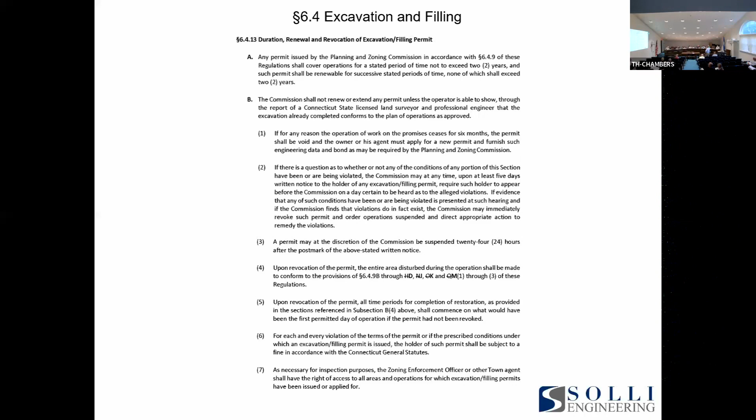And then towards the end of 6.4.23, it does talk about the waiver. We eliminated that component from the regulations, and the courts have continued to reinforce that this commission doesn't have the ability to do that.

So what we propose, we do believe is in accordance with both the comprehensive plan and the plan of conservation and development. The POCD in several different sections talks about encouraging economic development by providing this clarity and this clarification. This really allows the commission to view applications on a case-by-case basis, evaluate what's being proposed from a grading standpoint, and make decisions without having to rely or refer back to this waiver provision, which again has been shown to not be within your purview.

On page, I'm just going to touch on a couple of these. In the introduction on page 8, it talks a lot about a survey that was conducted. A lot of the survey responses in that POCD talked about wanting to see continued growth and change, but incremental. Again, by allowing these changes to be enacted and adopted, it gives the commission further ability to do these applications on a case-by-case basis and kind of encourage and fuel that growth.

All right, so you all know that we need to change this language. By changing it in this manner, the slope and grading requirements and the importing of material will be under our control in each application. There won't be a blanket statement saying you can't do any of this, and then we come back later and say, oh, but you can. This way, during each application brought before us, we'll be able to say this is what you need to do as far as grading, slopes, and importation or not.

Questions? So I know, Mike, you just said we still maintain control for grading and for what? Slopes. Still that. What about bringing fill in? Yes, for any application, the commission has the purview and authority to review what's being proposed—if it's import, what kind of material, how it will be handled—and you can include specific conditions for any application to address all of these things.

So again, these are even conditions that you could apply in the future for any application, but by limiting them as mandatory conditions and limiting the waiver provisions, it really gives you the most control and helps alleviate the issues that have been raised from some court proceedings.

Thank you. No other questions. Just out of curiosity, if that's the case and it was under our control to begin with, why were they written into the regulations to begin with?

That's a great question. We went back from a historical standpoint, and the excavation and fill permit regulations have been enacted for a long time. I think the earliest version I saw was 2003. A lot of the conditions were written very similarly. I'm not sure where the 27 degrees to the horizontal language even came from. A lot of communities don't have that level of specificity in terms of standard conditions with excavation and fill permit regulations, so I'm not sure where it came from. But I think the waiver test is something that came up probably in the last 10 years, and it's just really been tested in some court proceedings recently.

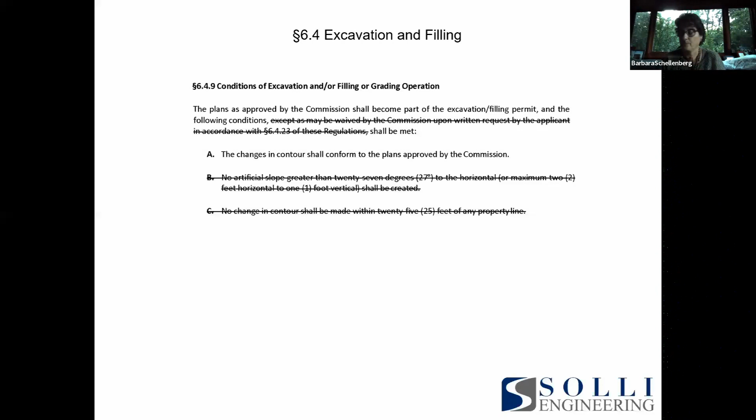That's all I needed to hear. I'm good. Commissioner Ambrosi, yeah, so where are we moving?

So, that's the stuff, right? Yes, correct. And I believe that other towns may be a little bit more strict, but I don't believe other towns just remove the regulations.

Well, again, we're not eliminating the excavation and fill permit regulations. No, but we're eliminating distance, we're eliminating certain things. Yes, we're proposing to. Certain towns have different regulations than we do.

Yes. I believe that this should have been brought to the subcommittee before it was brought here, so we could look at the other regulations the town has for grading and fill permits, and for footage and grades and everything like that, because just removing them affects the whole town.

Well, I don't believe it affects the town. I don't believe it creates any negative implications or effects, because these are specific conditions that talk about very specific slope requirements within side property lines and front property lines.

Now, any application that comes before this commission has to include proposed grades. They have to show what grading is being proposed, if any grading is being proposed within a sideline or a front yard, or how far from the front yard. So this commission still has the ability to ask what the slope is there.

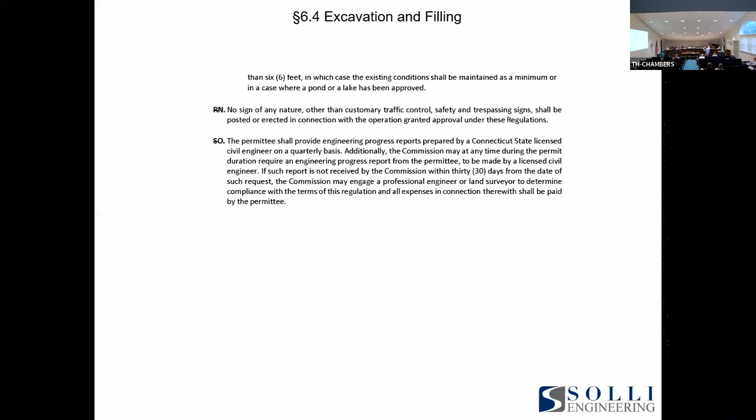There were a total of, A through S, from a standard condition standpoint, for the excavation regulations. We proposed to remove four and modify one additional one. So all of those other conditions, which are very appropriate, still apply.

Now, you've argued to go to ZBA. The Zoning Board of Appeals is a very strict process in how they review applications, and they have to look at what's being proposed and whether or not it creates a hardship, or what that hardship is, or if it's self-created.

If I was to come in with an application across two pieces of property where I wanted to develop and create a unified development, let's point to the Aldi, Panera Bread, and Noble Gas site. There's an overall development comprised of two different parcels, and there are provisions that say you can't change the contours within so many feet of a side yard, which would make that project not viable if this commission wasn't able to waive these standard conditions.

So again, it allows — we couldn't go to ZBA and say I need a variance for this requirement because it would be self-inflicted, self-created, and that's subject to a different type of test from a legal standpoint. But by eliminating those conditions from this waiver provision, this commission still has the authority to review proposed plans and review proposed grading.

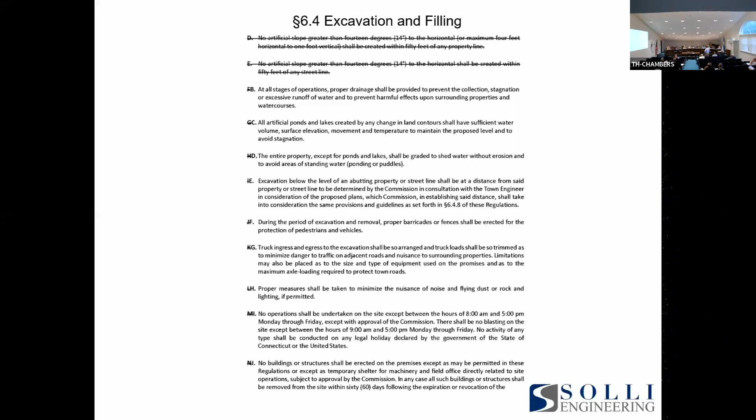The part I'm not catching here is, we take these out, strike them out of the regulations — what mechanism is in place to get that application in front of us? Oh, it's still going to come in front of us. Yes, anyway. Okay, those requirements are gone. Got it — upfront requirements, which we can put in, you have to go to the ZBA route for those provisions. I understand that. I'm saying to you that the requirements are gone.

And we can make our regulations to accommodate whatever requirements we want. But right now we're just removing them. We're not changing them, we're not making them better for the town, we're not making them uniform across other towns — we're just removing them. It should have been brought in front of the subcommittee, and we should have hashed it out before we ended up changing the regulations.

It depends on who you ask, though, if it's not better for the town. If you ask the land use attorney, it's better for the town.

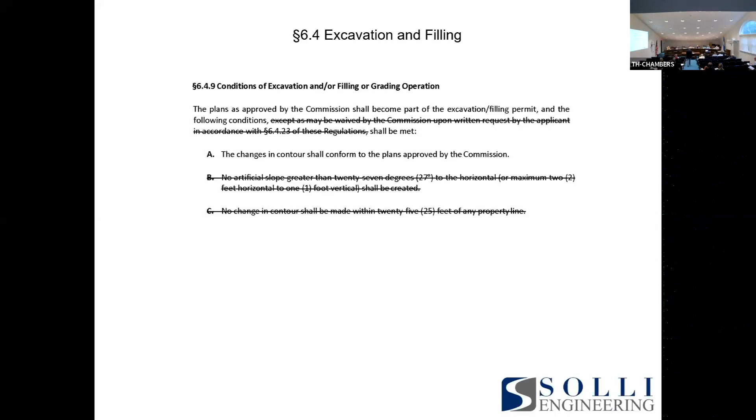All right, let's go to the public now. This is a public hearing. If there are any members of the public here tonight that would like to comment on this application, please raise your hand. I see someone with their hand raised — right up front. Please speak into the microphone and just give your name and address for the record.

Thank you, Mr. Chairman, members of the commission, staff. My name is Joel Green. I practice law in Bridgeport, the law offices of Green and Gross. It's my pleasure to appear before you this evening on behalf of Peter Metropolis, who's an owner of the property at 136 Timothy Hill Road in Monroe.

By the way, just a note, when I looked online, I did not see the exhibits which were referenced. I'm not sure whether they're... oh, they are online, because they were not in the packet or in the materials today. Mr. Chairman, I had staff check that today, so I know they are on. Yeah, okay, well this morning I didn't see them, but be that as it may...

I'm going to ask you as a commission, on behalf of my client, to judge the wisdom, the ethics, and whether you are fulfilling your duty to the citizens of the town of Monroe with respect to this application.

I've been before you before. I was before you on the Cambridge Drive, Independence Drive project. This waiver argument is nothing new.

It was already tested by the court in the McKenzie matter, which was in this town. The court said you can't waive these requirements on a case-by-case basis. So the answer is not to simply have no standards for slopes and filling along boundary lines, but, to Commissioner Ambrosie's point, study it.

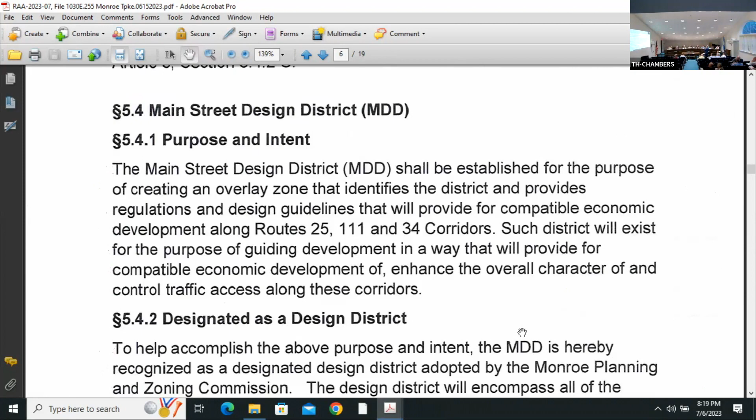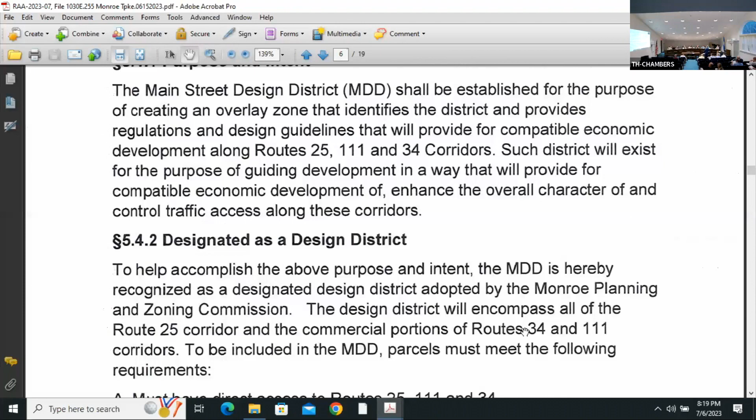So this is our first - I'll just bring it up to the top. You have copies of all of this; it's all been filed electronically as well. This is the Main Street Design District. One of your requirements when asking for a zone text amendment is to present the full current zone text with regulations. You can see here it provides for compatible economic development along Routes 25, 111 and 34 corridors. As I said at the beginning, this property sits on 111, designated as a design district.

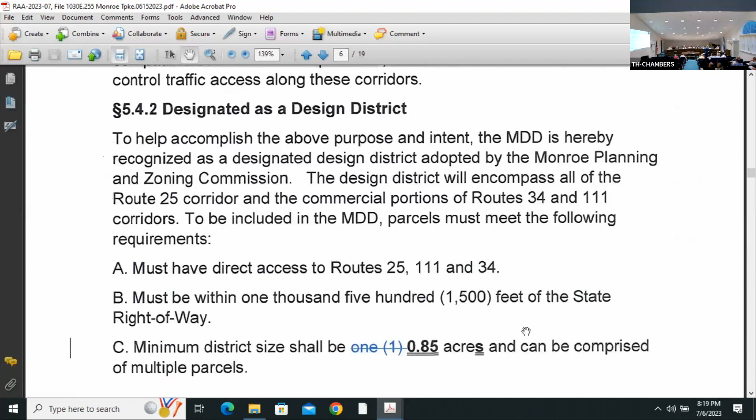The only text change we're asking for here is the minimum district size, currently required to be 1 acre. We're asking for 0.85 acres. Right now the parcel is actually 0.89 or 0.9 acres. I'll talk about how that's in compliance with the plan of conservation and development and comprehensive plan in a moment. But this is the first required step or action by the commission if it sees fit to approve this application or move forward in the process. We would need to, and have had conversations with town attorney Ben Marino about this.

He felt that we needed to apply for this zone text amendment. I respectfully disagreed with him based on a regulation in the Town of Monroe regulations, which speaks to lot size. And I just want to bring it up because I think it's important to mention we're still applying for it. We're still going along with the town attorney's recommendation, because he's more familiar with the Monroe zoning regulations than we are at this point.

So in the Monroe zoning regulations, the use of a non-conforming lot of record, a building or structure may be erected as permitted use on any existing lot of record which does not conform to the minimum required lot area or lot shape requirements of these regulations, provided that it was in existence prior to 1963, which I did an extensive title search. This parcel was. It was not created by the recording of a first cut or a lot line revision. This parcel doesn't show up in any type of subdivision maps from my title search, or has never been declared as 'not a building lot' on a map recorded in the Monroe land records. All other bulk regulations and applicable provisions of these regulations can be complied with.

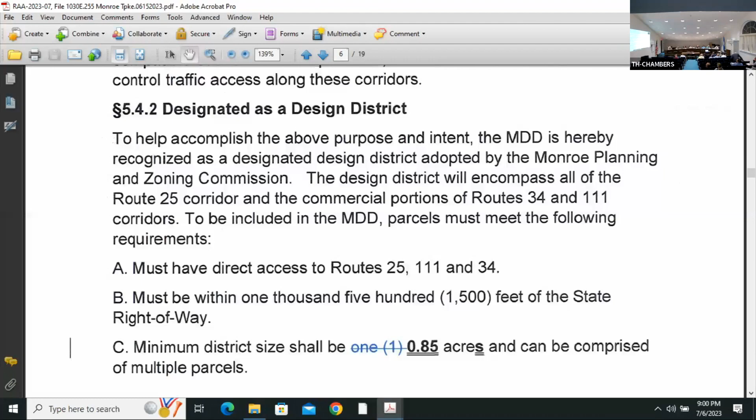Do you want to close this portion of the public hearing? We'll leave it open, I'd like to leave it open if the commission would allow. Want to move on to the next? I would, and I might just make one comment to follow up to Mr. Ambrosi—I apologize, it was Connecticut General Statute 13A-49, the discontinuance statute, and the related case law, you can get that information. We'd like to leave it open.

All right, then we'll move on to the second portion or the next public hearing, ZCA/RAA 2023-02. And this is the petition for a zone map regulation change to rezone the property to SDD number 3.

That's correct, and I had read that narrative at the beginning of this conversation, so I tied it to the various aspects of your plan of conservation and development. So I don't know if there are any further comments about whether this proposed regulation change to SDD3 is in compliance with the plan, or if there are any thoughts on that in addition to what we just heard. Are there any questions?

So we're going to see the SEP next, which would be the actual diagram of the property and egress. So I do have a question. Go ahead, sorry. So you kind of mentioned your opinion that if we were not to grant the previous application you just came in front of, that you believe that the zone, being pre-existing non-conforming, is something we could still approve—would it be approved as an SDD, or would it be different? You get what I'm trying to get at—or would it just be a different approval of the site plan without this change also?

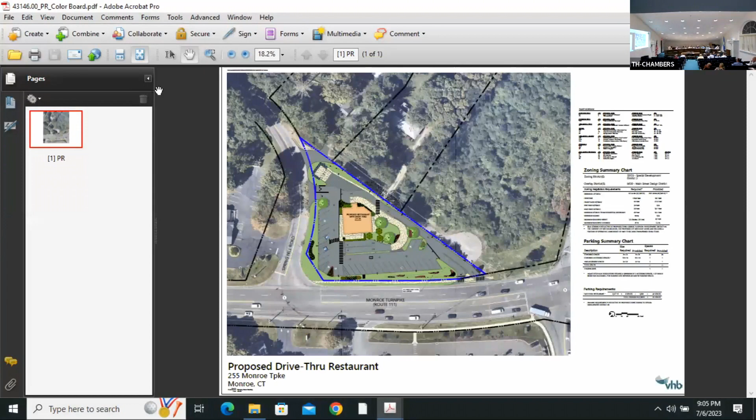Good evening, Mr. Chair, members of the commission. My name is Mark Grocki. I'm a senior engineer with VHB. Our offices are located at 100 Great Meadow Road in Wethersfield, Connecticut. I am responsible for the site plan civil design aspect of this application.

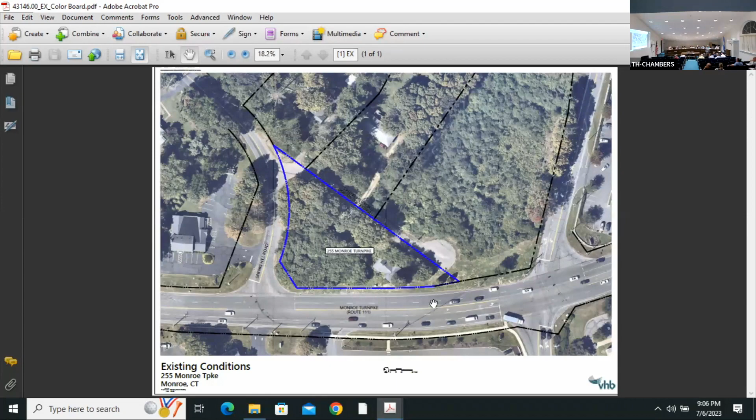Here with me, like we mentioned before, is Charlie Baker. He'll be discussing a little bit of the traffic impacts and the traffic study submitted for the application. So just to go over the existing site, so everybody's familiar, let me zoom in here a little bit. The subject property is 255 Monroe Turnpike.

North is kind of page right. We have Spring Hill Road to the south here, Monroe Turnpike to the east. This is the discontinued portion of Spring Hill Road with the cul-de-sac. The neighboring property to the north is where that Chipotle and Jersey Mike's, I believe it is, is currently under construction right now, with building pads already set up. These are the two abutting residential properties to the north.

So our property is very minorly developed. There is an existing residential house on the property here. It is vacant, and the majority of the property is all undeveloped, overgrown shrubs and trees. Not the most sightly at this time.

Again, like Attorney Christine mentioned, currently this is an LOR district. The abutting parcel here is LOR, the abutting parcel to the north is residential, and the parcel to the south is also LOR. The entire corridor on this west side is part of the MDD Main Street Design Development District overlay, and we're here to take advantage of that regulation and propose our own SDD number 3 zone within that overlay district for 255.

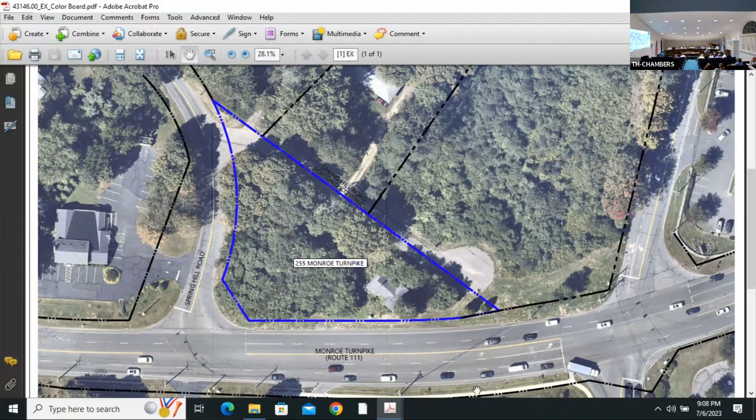And then just to orient ourselves to the east here, this is the Goodwill store. So our proposed development, let's zoom in here a little bit. What we are proposing is about a 2,500 square foot Starbucks restaurant with a drive-through. Just to the east side here will be an outdoor patio table area, about 350 square feet. The drive-through for the facility will be on this west side here.

We are proposing 30 parking spaces. We've had many discussions with Starbucks, and we feel very comfortable and adequate with the number of parking required or presented for the site. Site access is going to be proposed from 2 curb cuts. One will be a restricted right-out driveway on Monroe Turnpike. Another curb cut will be a full access off of Spring Hill Road, pushing as far back from the intersection as we could.

With the drive-through lane and pickup pushed on the west side of the building, we really tried to maximize the queuing for the building and the drive-through operation as much as we could. We have a double lane configuration, tapering down to a single lane.

Right here is the menu board where a patron would order for the drive-through service, then swing around and pick it up at the window. The total queuing we can get within this configuration is 15 queues, and if any queuing spills out into the drive aisle in front of the building, we can get about 5 more for about 20 queued vehicles.

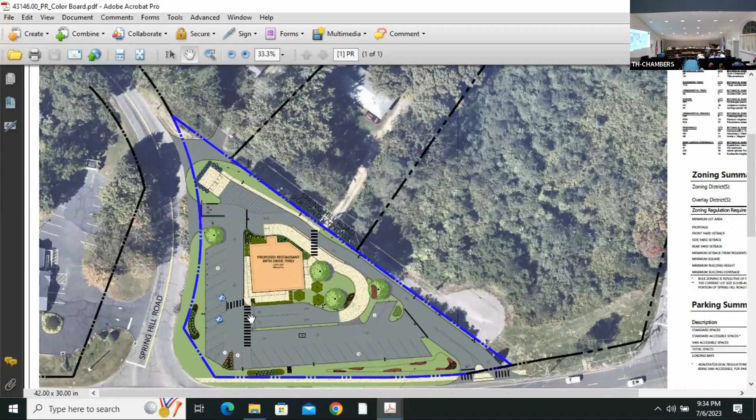Yeah, there's all these directional arrows right at this. You can't see right here, but there is a sign right here that says drive-through. Take a right, and there's a do-not-enter sign right here. Obviously we have the striping, but also big do-not-enter signs, so you're not going forward. Immediately you have the directional signage to take a right coming down, and right here—let me zoom in a little bit more. Can you show some of the drafting plans? Yes, I can, if you give us a little better perspective on size.

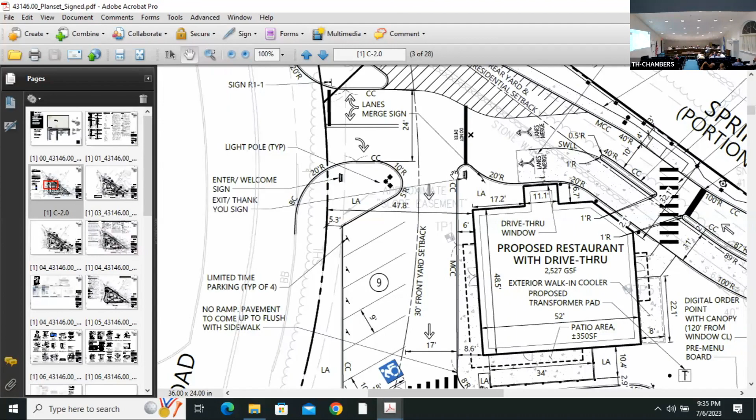Here's the first enter welcome signage right here, it'll have the arrow for the drive-through. This is the do-not-enter signage right here. Coming around, imagine you're driving down this drive aisle—you immediately see on the left the drive-through entrance sign right here, and then also one on this side. And then here's the clearance bar, so it's kind of like a double clearance, and it'll be marked.

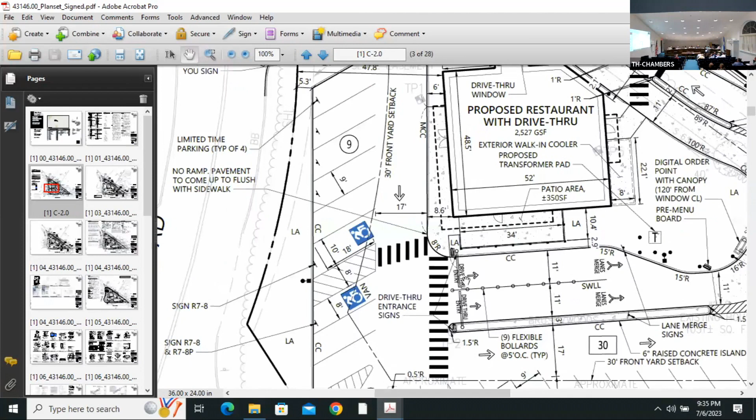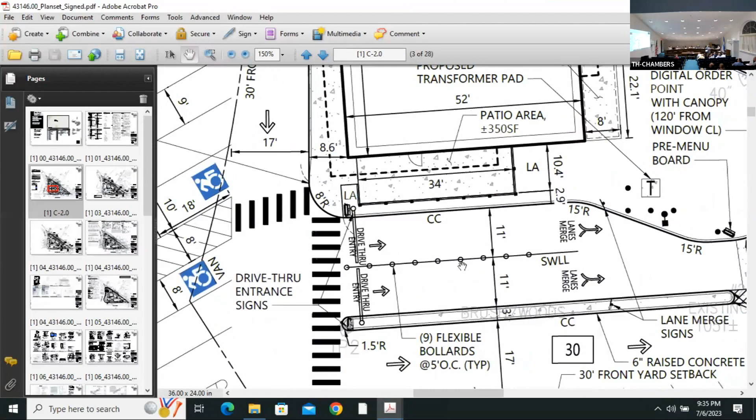Yeah, and you can see right here, drive-through entry. This will be a pavement marking, physically painted on the ground—drive-through entry here, drive-through entry. These will be flexible bollards, not a concrete fill bollard, it's like a flexible PVC in case somebody runs it over. That just helps delineate between the lanes until it opens up and gets wide enough for a vehicle to actually merge here.

Starbucks is very particular about having the seventh queued car at the ordering point, because they understand that once that seventh car is there and then coming to actually pick up your order, it gives them enough time to prep your order. They've got it down to a science. Coming back around, you have up to car number 12 at the end point here, and then you'd have 13, 14, and 15 in the second lane. I think what would happen is you probably never see the entire lane filled up—people start to recognize once they see one car here and another free area open, they're going to start alternating, like Mr. Condon said, kind of a zippering effect back and forth.

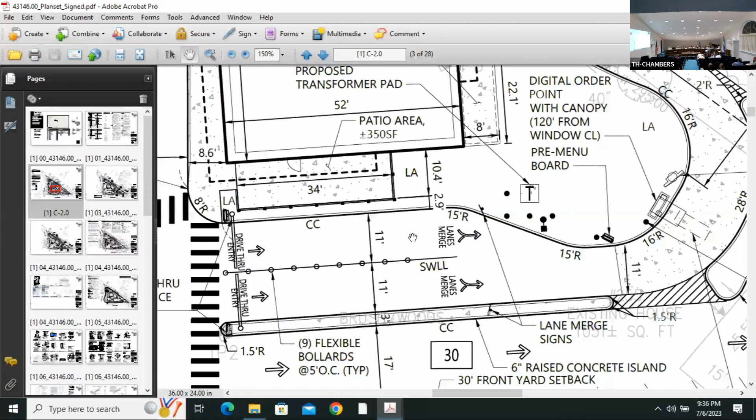Can you zoom in again? I don't have good eyes tonight. Where are the parking spots? Are there any right in front? Okay, so they're along the side—you have 9 spots here.

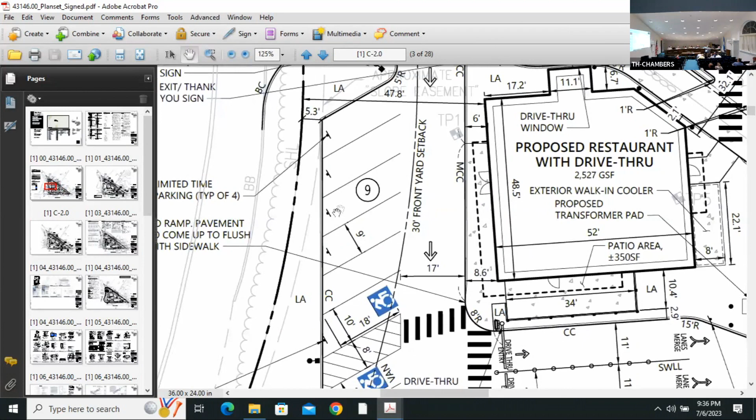These first four are the quick time-limited spots from Uber Eats or DoorDash pickup. Is that for pickup too, for those of us that order ahead of time? Or if you have the app, just right in here, they designated this as the form to pick up.

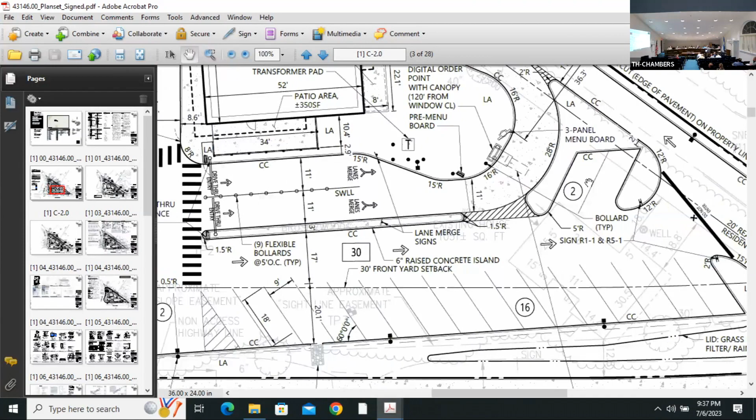Okay, so park here, ADA space with the ADA accessible route. You're certainly free to park next to it, two more down here, and then wrap around another two down here, and then another 16 to the end, putting two more. On these cars, have you tested if people can back out of these spots even if there's people queued up?

And where's the front entrance to the building? Like where are we all walking in? So there's one entrance on the south side of the building here, you can see the double door. And like I said before, this is a patio table area. But I think that's the main entrance.

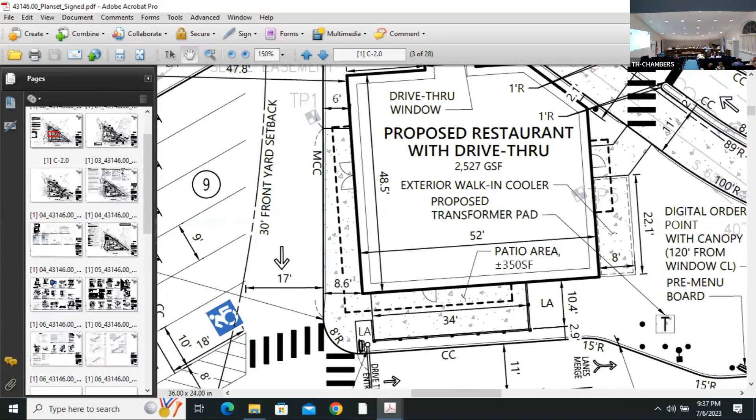So we have a floor plan. Is there a sidewalk that's going to go from where the quick pickups are right to that front door, maybe a crosswalk, to bring awareness to people coming in to slow down in case anyone's trying to get across?

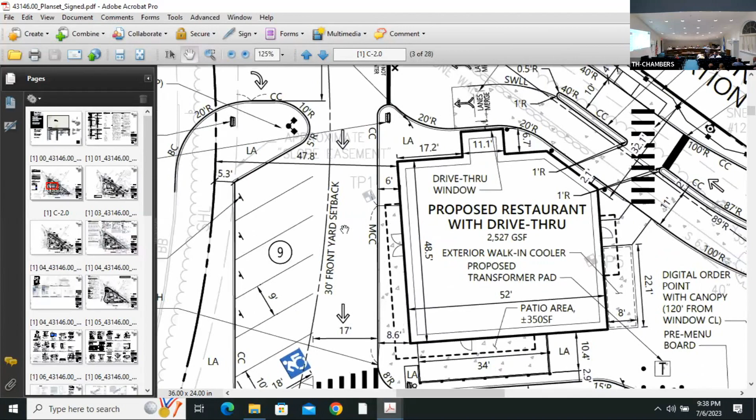Not at the moment, but we can certainly consider something. We do have the crosswalk. I just don't know if people are going to get out of the car all the way down there, walk all the way up, cross over, and walk all the way back down again. We could look into adding a sidewalk and crosswalk. We've done that for other Starbucks.

And what about deliveries? What time of day, or is there enough room in here for these trucks to get around comfortably? The benefit of this layout is that most deliveries, based on routing we've looked at, will be coming this way from Monroe Turnpike. What a delivery vehicle would do, this will actually be a mountable area.

Spring Hill Road's the other way. Yes, I'm sorry, that's Monroe Turnpike, that's 111. I know what you meant. So we could accommodate a WB50 tractor trailer coming into the site here.

What they would do is use the bypass lane. This loading area, regulations require a 12 by 50 loading area, but we're exceeding that with the striped area here, so a loading vehicle can easily park their vehicle here. That was actually an engineering comment too, so when we respond to the engineering comments, I can provide an actual plan if you'd like to see it.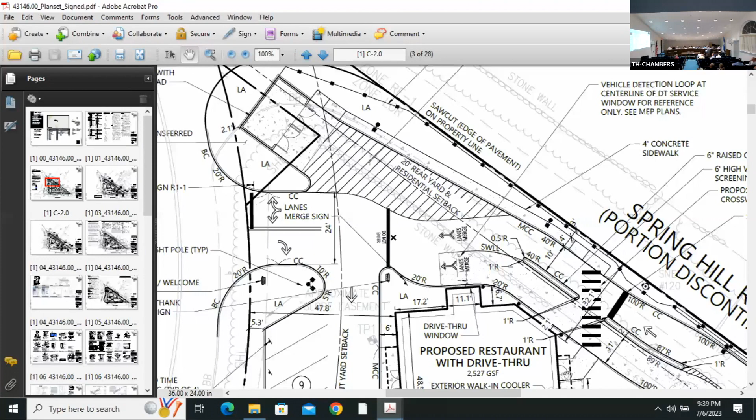A truck would be parked in the loading area here, and utilize the sidewalk to come down—that's why we have a crosswalk here—to come down to the back door, which would be the loading entrance. Then a WB50 can back up slightly and then exit, take a left onto Spring Hill Road, and access the signal.

Me being annoying, okay, can you zoom back in again please? So when you're entering from Spring Hill Road, we can't cut out that island at all, right? Because my concern is, I've been to a lot of Starbucks and I've never seen more than 20 cars in a queue. If we happen to have 25 cars going up to Spring, can somebody get in here to go park and go in, or are they going to be stuck just waiting for that drive-up line to process through?

Yeah, 20 is on the screen here, Starbucks is very comfortable with the 15. If it happens, I suppose there would be traffic on Spring Hill.

My last question, I promise: is there a sidewalk along 111? Yes, that was a staff comment. We do have a proposed sidewalk. That's all, thank you.

My name is Bernie Mazeko. I'm Karen's husband, and our house at 360 Spring Hill Road is right across the street here. Let's put the map back up and I'll show you where we live.

They're talking about the two houses over in this area, the residences, on an extension part of Spring Hill Road. The connection we put in here is actually listed as Spring Hill Extension. Spring Hill Road still continues all the way up this section. We live on the corner right next to the dentist, so we see this every day.

The way the road is being plowed, it's being plowed every winter and every snowstorm. His driveway, to get to his house, he's going to need access to that road, because I don't know if it's going to be considered part of half of the street. But the line's going to go up the middle, if that's been considered. He's going to have some problems with access to the two houses right there.

My concern is coming around here. This portion of the connection was put in -- they put a 7-degree bank -- we've been there over 40 years. When they put this section in, our house was initially part of this property. This part of the property was divided up when the daughter got married, and we're next to it, so we're actually part of that same parcel. That's why we're interested in seeing what's going to happen here.

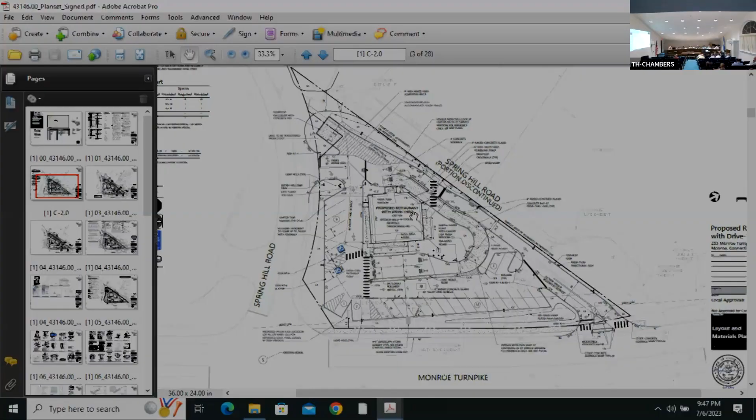Up to you. Thanks, for the record, Kevin Crusade. I'm just going to speak briefly. I don't know, Mr. Schultz, if you can pull that back up where it shows the Spring Hill Road portion discontinued. Once it was discontinued, I think that was effective in the November or January timeframe when it was recorded on the land records, and I'll provide that information at the next hearing.

The town would no longer have any responsibility on that road. However, the abutting property owners have a right of access, an easement for access and for utilities, and that's included in part of that statute where they maintain the access rights to that portion of the road.

As part of the proposal, it's not shown here, but as part of the discussions originally, the applicant had offered to construct driveways for those two parcels. We're still in discussion. One of the parcels is in an estate and also in foreclosure, as I understand it. The attorney for that estate has not returned my emails, phone calls, or letters to discuss that. So I don't know if there's a fiduciary of that estate with the ability to enter into an agreement, or if they're going to wait until the estate settles out. But that was part of the discussion.

But they will still have access. This statute is designed so that parcels are not landlocked for access or utility purposes. But the town will not continue to maintain it. I just wanted to highlight that part of it. I don't have any other comments on that.

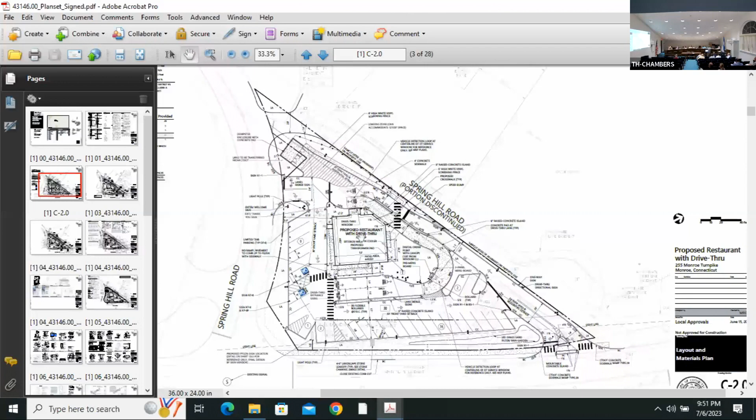Perhaps you could discuss screening at the same time as construction of the driveways, landscape screening on the other side of the fence. Sorry, I thought we discussed that and we're going to look into that further. No, he means when you discuss the driveways with the residents. We'll talk with them about putting that up.

So just to clarify for everybody, who will be responsible for plowing or snow removal on those driveways all the way out to Spring Hill Road? This will be their responsibility. That's a town road. Not anymore, sir. That end was discontinued, so that portion is no longer maintained, as of the beginning of this year.

It started in November, but as soon as that officially hit the land records, they were supposed to hire a private contractor — that's what I'm trying to find out. But I know the town no longer plows it. The applicant has offered, in talks with the staff and the town, that they would maintain and plow those driveways for those adjacent property owners. Okay, thank you. All right.

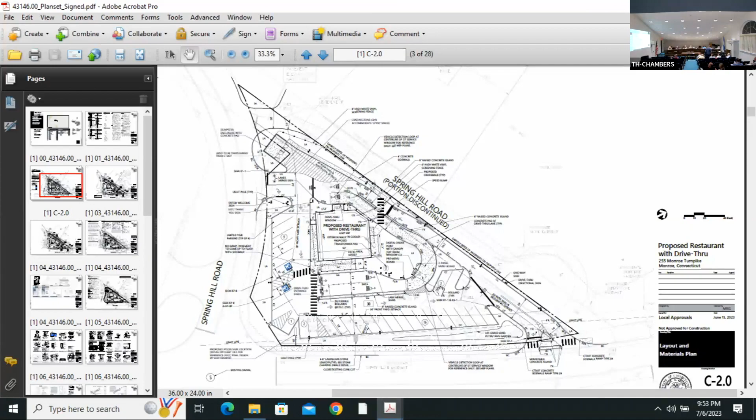One question before we move on. Can you blow that picture up a little bit more for your engineer? Which part? The part down there where you have the two lanes. Your queue in there is two lanes, up to 15 cars. Right here? Yeah, move over. You have a bypass lane over here? No, the bypass is on the outside of this island right here.

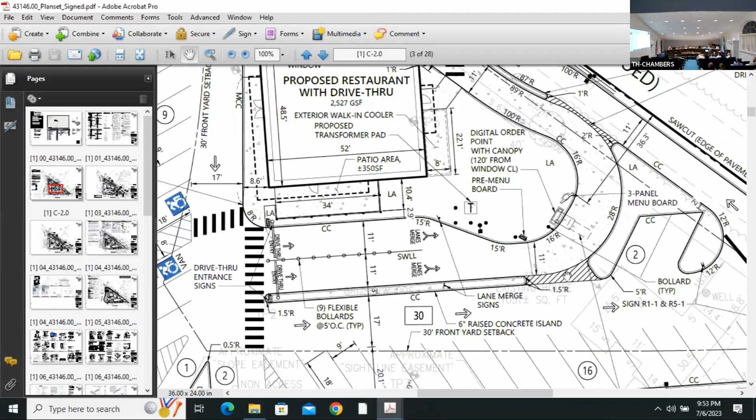Okay, how about coming down alongside the building? How wide is that lane? Not here, go up on the other building. You mean the left side? On the left side, yep. When you're coming down there, do you have a bypass lane there?

The 17 feet wide is adequate for bypass. That conforms to the local zoning regulations for one-way traffic. So if two cars queue up at the end and another queues up next to it, you have a dedicated bypass lane, which you're going to have to have. Yeah, if a car's queued here, you can get around.

No, I understand that, but if you got 15, then 16, 17 in two lanes, are they going to block that road? Is there any way to prevent them from doing that? So what prevents them from queuing all the way up to the corner? What's to prevent that from happening on this plan?

I think human nature would understand. Well, no, human nature—we have problems at McDonald's. It's not human nature. Maybe I'm misinterpreting the question. No, I'm saying to you, what's to prevent two lanes from queuing up on the side of that road?

So just to clarify, the 15 queue is the expected queue that we anticipate. Those additional 5 are really just a surplus for really heavy traffic times that we're not expecting. No, we've been through this already at McDonald's.

Okay, we're queuing onto the main road. So we have two lanes, and we've had problems, especially on a Saturday, where those lanes are blocked because a lot of people go to drive-thrus now. They don't bother going inside the business anymore, they all go to drive-thrus. So I want to know how you're going to prevent the queuing behind that building in the two lanes.

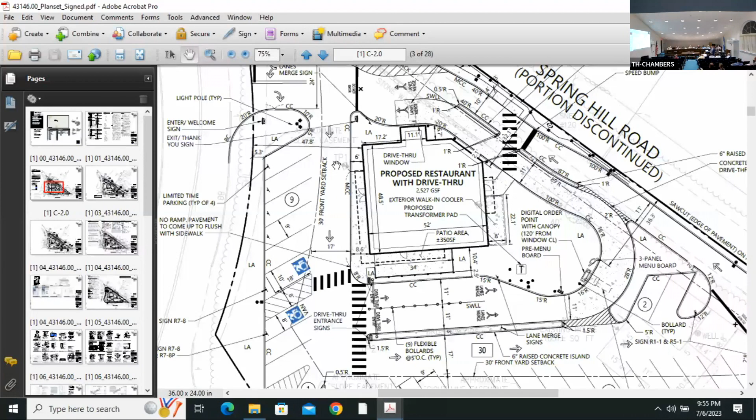Our next public hearing is excavation and fill, EFP 2023-02, file number 112. This is 260 Spring Hill Road. This is a new application. Do we have notices for the excavation and fill?

Yep. Planning and Zoning Commission, in accordance with CGS 8-7D, a public hearing will be held on Thursday, July 6th at 7 o'clock or soon thereafter. EFP 2023-02, file number 112, 260 Spring Hill Road, excavation and filling permit application for proposed site preparation for a future building, driveway, and parking area at 260 Spring Hill Road, Assessor Map 006, Lot 006, Eldorado Holdings LLC, owner, Rose Tiso and Company LLC, representative. Notice was published in Voices twice, on June 21st and June 28th.

You have the exhibits? Yes, exhibit number 1, application set plans; 2, health department comments; 3, engineering comments. That is all, Mr. Chairman. Okay, for the applicant?

So what we're doing in the meantime is this phase 0, and what we're going to do is have a soil erosion control plan during this cut and fill. We want to stop any kind of rain or soil runoff during this phase of the project from coming off the property. We want to contain everything on property, clean that stormwater, and retain it as much as possible on property.

And then so that anything that goes off the property is clean water, and actually less water than there is today. So we want to increase that water quality and reduce that peak volume. Some things we're proposing: basically a silt fence ring, a reinforced silt fence ring around the property. It's not just silt fence, that black fence you see during construction. We also have some staked hay bales behind it so there's some structural rigidity to that fence, due to the slopes we have here.

So that when there is a heavy rainstorm, it hits that fence without knocking it over. I'll show you the detail in a minute. We have some stockpiles for topsoil that will be generated on site, which also has a silt fence ring around it. We have an anti-tracking pad here coming off the end of Technology Drive, which is basically large riprap in a bed on that soil, so that any trucks coming off the property, if they have mud on the wheels, it gets knocked off by that large riprap and doesn't get tracked into Technology Drive or then into Route 111.

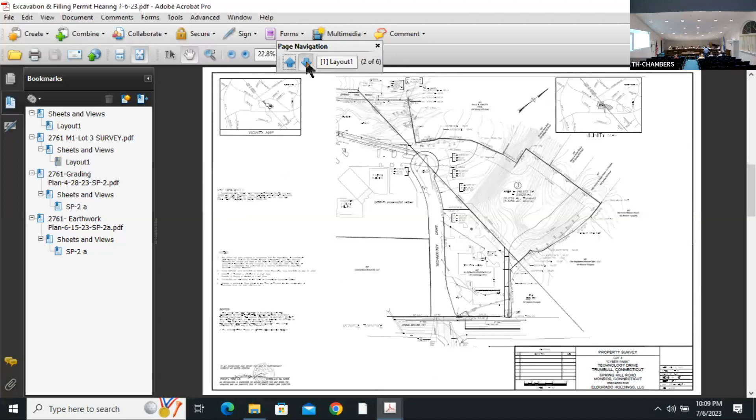I think that's pretty much it. I think everybody's kind of tired, so I don't want to dwell on anything. If there's any questions, the details are here if you want to look at them - here's the swirl concentrator, here's the silt sacks and the diversion berms.

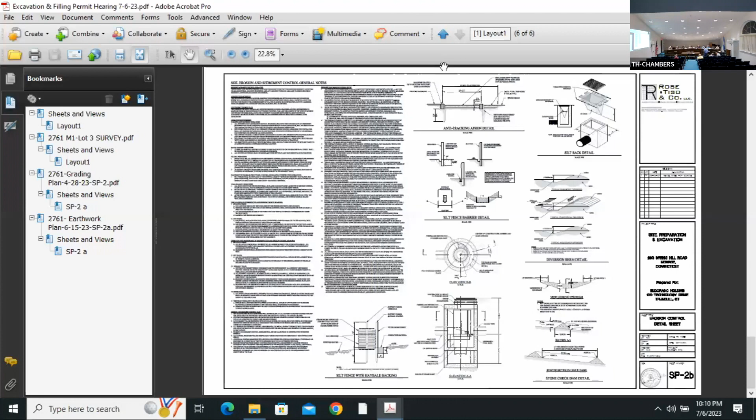Just because there's rock doesn't mean there's necessarily blasting. If it's weathered rock and people can rip it, there's no need for blasting. But if it's harder stone, you'd have to do some drills and caps and blast it to get rid of it. We did do some preliminary borings. I don't think we saw a whole lot of rock, but there's probably likelihood here where these couple of red areas are, up on that knob. So the condition of the rock is really going to determine if there's going to be blasting or not, but it's possible. Okay, no other questions?

May I say something? I don't have a question, I just want to supplement information we shared here. My name is Joseph Goldwyn. I work for the owner developer of the property. With all respect, the gentleman who made the comment deserves an answer.

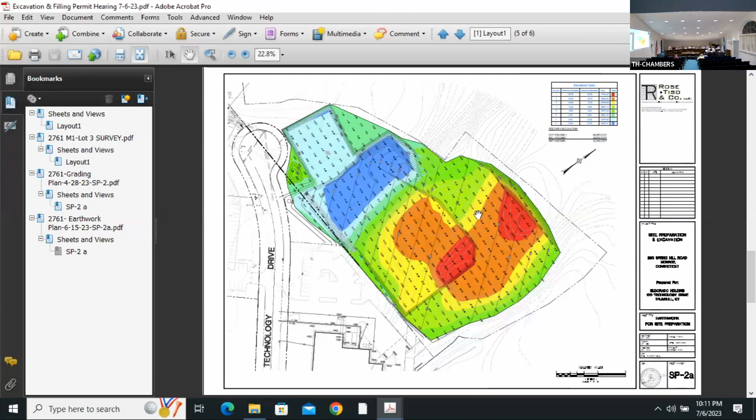The point he made about Long Spring Hill Road — along Spring Hill Road there's a brook that is quite substantial at times, and for that reason we're not doing any work within probably 1,000 feet or so from the property. So all of the work is concentrated from the point where the cursor is now to the right. We are not touching anything in the proximity of the brook. Thank you for your comment.

Nicole, did you have any? I'm done. Going to Rob. I know we talked about this in subcommittee and covered a few of the questions, just to bring them back to light. There were some borings done and some blasting preliminary estimates. So 43,000 yards are coming out, what you said. Do you have any idea what the ratio is with stone? And how do you plan on processing that?

As we had talked about, we wouldn't be processing on site, just taking it into smaller pieces and trucking it out. Now, as far as, is there a tenant been identified? No tenant has been identified. There are several irons in the fire, but not something we can release because it's not for sure.

I don't know if there's any additional clarity as far as this potential sewer hookup. It's anticipated that, at the moment, we're not going to have a sewer hookup, and that we're going to be limited to putting a system on site for septic. Have you done any soil borings for that? Have not done soil borings for that yet. That's part of the process of trying to remove some fill, because then we'll know better what we have and where we can do that.

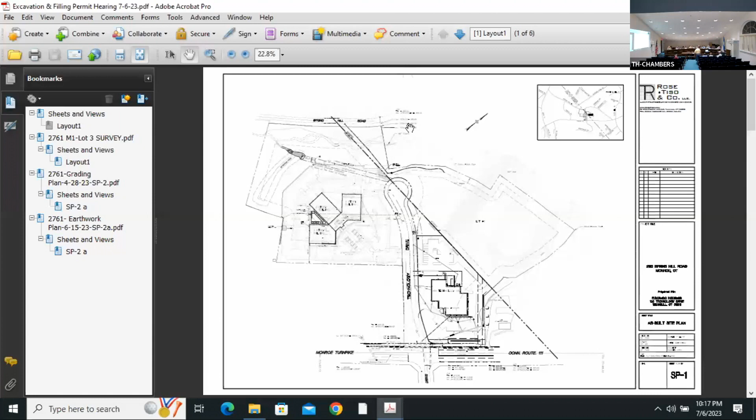I have 2 comments. I didn't hear any mention of any kind of perimeter greenery barrier where 260 Spring Hill Road abuts the other Monroe properties. I don't know what the minimum distance is, but it probably should be like 35, 40 feet at a minimum.

And the other comment was on blasting. Years ago, my father's house at 257, we abut the Trumbull town line and we're next door to 5 Cutler's Farm Road, which is where that concrete monstrosity storage building is. They had a blast - we're probably about 100 feet from where they were blasting, and my father was getting pelted with rocks from the blasting.

We also had to dig up a drainage pipe, taking our water from our gutters down and away from the house. So I think there should be some stringent notification to the neighbors about blasting, as well as emphasizing safety. I don't know how you do that, you might have it in your regulations, but I think that should be taken into consideration.

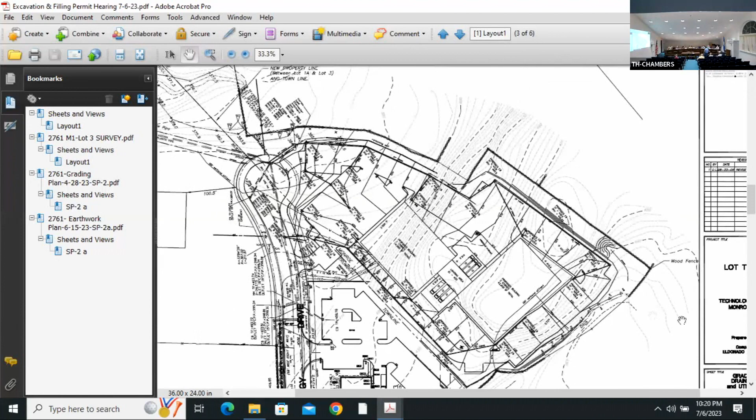So you can see here, we have that right there. Our building setback is 100 feet, and the cut goes into about half of that setback. So there's about 100 feet of native forest that we're going to leave in place, then it goes down to about 50 feet and opens back up to about 100. We're going to be substantially lower than this property, so the trees and existing greenery will be enough screen that you won't be able to see this.

Then the next question was the blasting survey. It's state statute that we have to go to the fire marshal and apply for a blasting permit. That blaster has to have a license, has to have insurance, and has to do a pre-blast survey within a certain radius of the blasting. Any property within the blast influence, they have to go check their wells and basements, because they don't want to be blasting and then someone comes and says my foundation's cracked or my well doesn't work. They want to be able to say beforehand, here are the pictures, here's what we saw before we went to blasting. And if there is damage, they have to carry insurance for it. So that concern is covered by state statute in the fire code, and the fire marshal is the administrator of that.

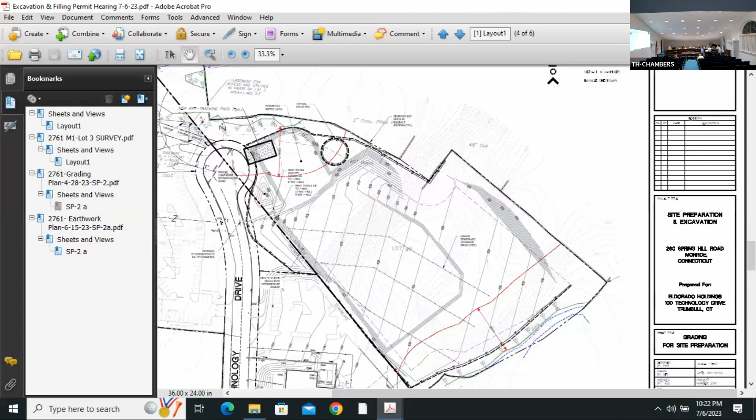Okay, so are we closing this hearing or are we leaving this open? What would you like to do? Close the hearing, I don't see any reason not to. All right, do we have anything else we need? If not, then I'll close this hearing.

Open, close, you guys still around there? But if you want to use the route, yeah. It's 10:32, so this is 2023-08, file number 16568, 555 Sand Hill Road. You have the SCP 2023-08, file 16568, 555 Sand Hill Road, special exception permit for two proposed warehouse additions to existing building totaling 15,500 plus or minus square feet, and site improvements located at 555 Sand Hill Road, assessor map 114, lot 004, Connecticut Precast Corp., owner, Bowler Engineering and Land Surveying, Representative.

I read the wrong thing, shocker. That's okay, that's all right, it's all the same. Notice was published twice in Voices. You did great, you did great, we're so proud of you, you're so good.

All right, the exhibits. Mr. Chairman, number 1, application and set of plans. Number 2, Health Department, that is all. All right, so we're going to continue this hearing until our next meeting.